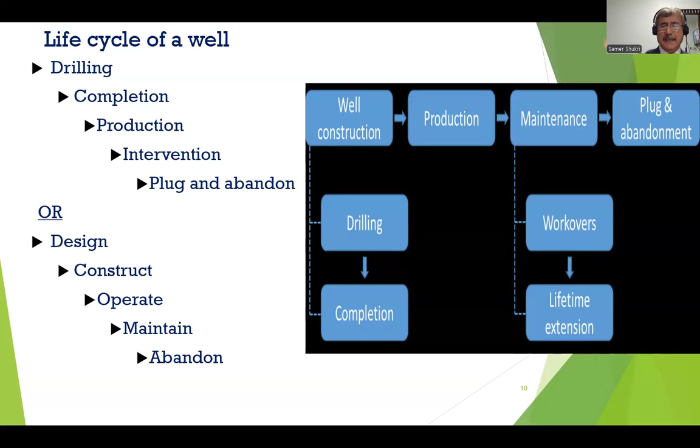Now, the 3D seismic, as I mentioned, is one of the most important techniques to help geologists and engineers find out where possible hydrocarbon is located. We are not sure, but possible hydrocarbon is below thousands of feet, maybe 10,000 feet below the Earth's surface. Without 3D seismic technology, many oil fields cannot be discovered.

As I told you, we have 2D, 3D, 4D. 4D is the most advanced technology for the seismic survey. The geoscientists have a secret weapon called seismic exploration. And it involves sending acoustic or sonic energy, which takes the form of wavelets, through the layers downhole into the ground to get a sound picture beneath the surface.

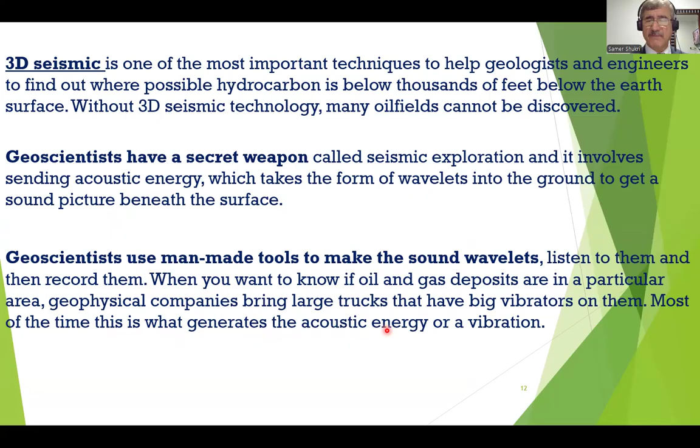They use geophones. The geophone will be the receiver. Geophones, or hydrophones in the offshore. In the sea, we use hydrophones. On the land, we use geophones, or very sensitive seismic microphones.

It can receive the sonic waves to hear the reflected sounds, but sometimes they set off small buried charges. Sometimes we put very small charges or explosives. Instead of vibrating with a huge machine, we use maybe an explosion, very small, maybe 5 grams or like this. It doesn't affect anything, and it is allowed in our industry.

So they set many geophones, or receivers, on the ground on the other side in a line, and they are attached. We attach these geophones to a recorder inside another truck. So one truck for sending waves, and one truck is connected with the geophones, like listeners.

The vibrators send thousands of wavelets down into all the different layers of the earth. Some of the wavelets bounce off - we have either reflection, like this, or we have refraction. What do you mean refraction? Look at me, please. This, then it moves on the surface of the layer, then it will go up. We call this one refraction, inkisar.

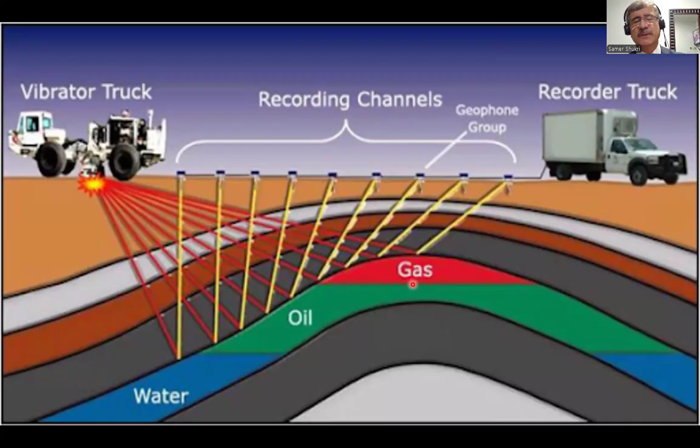So we have either the vibrator truck, or what we call small explosions, explosives. Then it will reflect to the geophones - recording channels, or geophones, we call it. All of them connect to the recording truck, the recorder, we call it. So this will tell you the possibility. Everything is a possibility. What ensures 100% that we should drill? Without the drilling, we are not sure.

Here we have offshore. We have a source of shock waves - we could use air guns, not explosives. What did you imagine? No, air guns. It will generate air waves, and it will reflect to the hydrophones. We call this one not geophones, but hydrophones.

Now I want to tell you about the IWCF. It is not allowed for anyone in respected companies, in your country, to work without this well control certificate. In your company it is very respected. I gave them a course last month and they are at a very high level, so they don't allow you to work if you don't have this well control certificate.

We have two types of certificates: either British, IWCF, International Well Control Forum, or IADC, which is American, based in Texas. IWCF is in Scotland, UK. The other one is IADC, International Association of Drilling Contractors, based in Texas, America. Some companies accept this one, some accept that one.

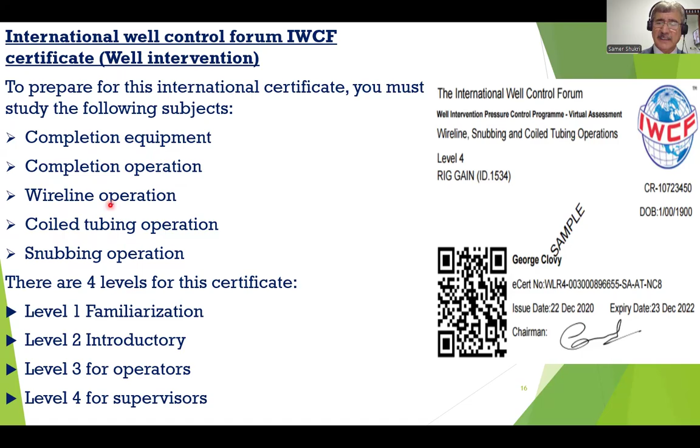For drilling, we have principles and procedures, equipment, and simulator. The simulator is not that difficult, but you need training to know the principles of it and how to work on it.

You will utilize it as if you are drilling or killing the well, same as a pilot. They don't allow the pilot to go straight to the aeroplane; they have to train him first on the simulator, with a different principle, then they allow him to go to the practical. It's the same for us.

This is also a sample. For example, surface BOP stack - we have surface stacks used onshore, and subsea stacks used offshore. Just take an idea now, so in the future when you need it, you can go through it. Also we have levels 1, 2, 3, 4. There are two types of stacks: surface and subsea.

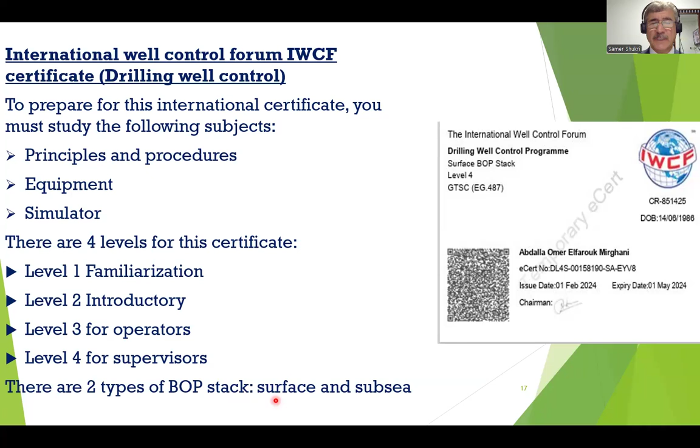For well control calculations, you have to know all of these, and I am sure you know them, but just for refresh I put them here. Please look at them; if you have any gap, you have to fill it, because these are like the alphabet for you as a petroleum engineer. You have to know hydrostatic pressure, bottom hole pressure, reservoir pressure, specific gravity, capacities, etc. I am sure all of you are very brilliant in these calculations, but I put them here just to ensure you are practicing them.

Now let us move on to the drilling rigs. What is the definition of the drilling rig? It is an integrated system. About 10 days ago I came back from Abu Dhabi where I delivered a course called rig inspection and audit.

I delivered it to 8 engineers; the month before, I delivered it to 11 engineers. So it is very important - every month companies require rig inspection and audit. So what is the drilling rig? We inspect every single piece in the rig. It is an integrated system, a group of pieces or systems that drills wells.

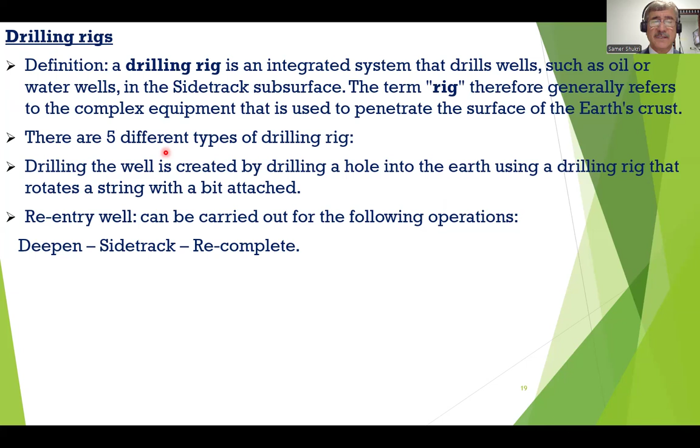Re-entry well operations can also be carried out for the following: either we can deepen or increase the depth of the well, side tracking, or recompletion.

The semi-submersible and the drill ship, we use these maybe in the North Sea, the Black Sea, the Gulf of Mexico. The drill ship has a depth capability up to 12,000 feet, while the semi-submersible rig goes up to 10,000 feet. So we have different rigs.

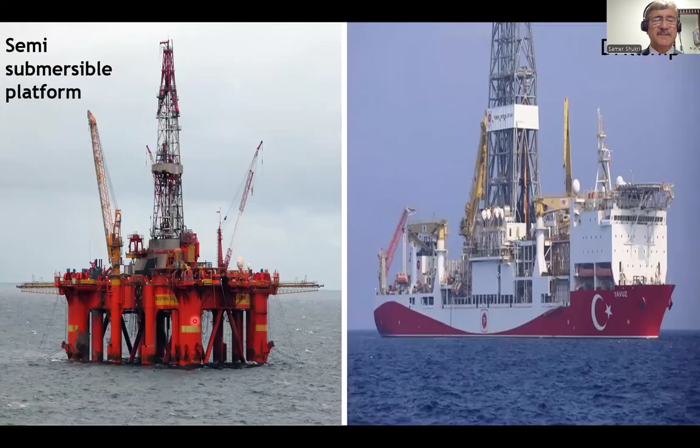And here, this is a Turkish drill ship, called Yavuz. They drilled in the Mediterranean and in the Black Sea. They found gas in the Black Sea, and the government gave us gas free of charge for 1 year because they discovered gas. For all the population of Turkey, 85 million, we took gas free of charge.

We didn't pay anything. Now, wells can be exploration or production, as I mentioned. Maybe also between them we have appraisal, only one well.

According to shape, we have vertical, horizontal, or deviated wells. We also have TVD and measured depth. What is the difference? If it is vertical, the TVD (true vertical depth) is the same as measured depth. While here, deviated, the measured depth is longer than the true vertical depth.

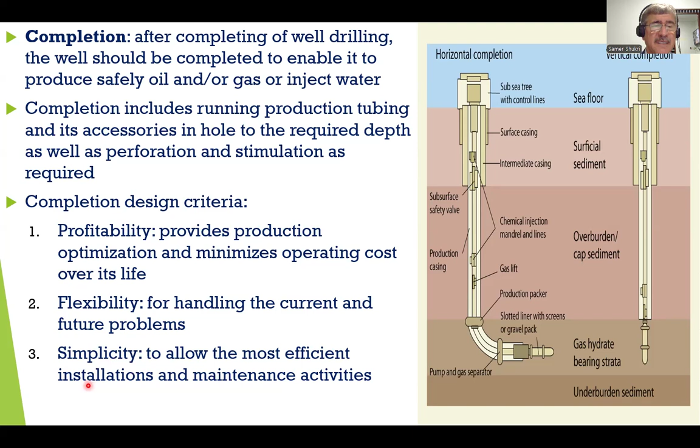So it should be profitable and minimize operating cost, which we call OPEX, over its life. Flexibility: it should be flexible for handling current and future problems. Simplicity: it should be as simple as possible to allow the most efficient installation and maintenance activities.

Here are the completion objectives. This is an example of completion, which we call a single selective completion. Look at this: how many reservoirs do we have? 1, 2, 3 - we call them bottom zone, middle zone, top zone. We isolate each from the others using packers, packer number 1, 2, 3.

Now, if we want to produce from this zone, we close the SSD (sliding side door) and set the plug here, then open this SSD. If we want to produce from here, we close the SSD, set the plug here, and open the SSD. If we want to produce only from here, we close the SSD and produce from that zone.

So the completion will protect the casing, as I told you, because the fluid has too many things: pressure, temperature, H2S, CO2, salts, water, asphaltene, sand, wax, etc. We have to protect the casing, because if you protect it, it will serve you for maybe 100 years instead of losing your well. It also provides optimum flow conditions.

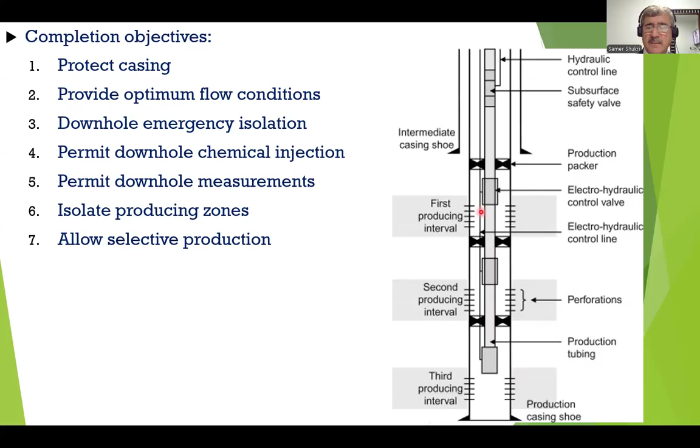What do we mean by consolidated reservoir? It should not be sandstone, because sandstone moves from the formation to the bottom of the hole and will plug it. But if we have, for example, limestone or dolomite, then it will not move.

So open hole completion has advantages and disadvantages. The advantage is the cost will be less and there will be less contamination. But for the disadvantages, if we run the casing with cement, it will make pollution and create restriction between the formation and the bottom of the hole.

We have a cased hole, perforated hole. You see, we have cased hole, perforated hole. This is also cased hole and perforated. We run casing, pump cement behind it, and then perforate it. You see the perforation. And here we have a dual packer, which we call this one.

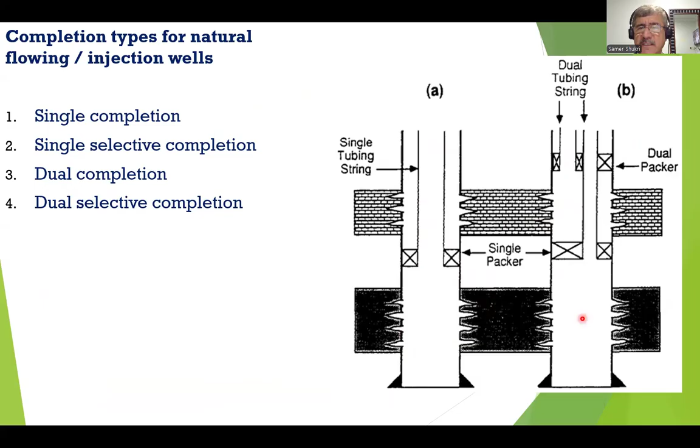We run the packer to isolate the zone above the top perforation and the tubing. This is single tubing and we can produce from here. Here we can produce from the top completion, a top reservoir, and here from the bottom reservoir - so long string and short string.

Now, another subject: if the well is not able to produce naturally, what shall we do, my friends? We have to use artificial lift. We have 5 artificial lift methods: gas lift, ESP (electrical submersible pump), beam pump or sucker rod, PCP (progressive cavity pump), and hydraulic or jet pump.

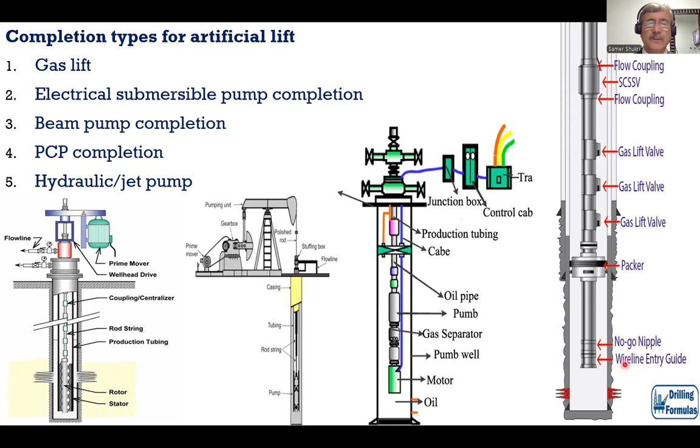Here is the completion. This is the top completion, this is the bottom completion. We have the packer, and we have the tubing hanger. The tubing hanger has four functions.

What are these functions? Let me read what Mr. Osama is asking: what are the operations used to open and close the packer?

The packer - we have either a permanent packer or a retrievable packer. The permanent packer, we run it either with a drill string or with electric line. We set it, and this needs milling to retrieve it. When we have a workover, we have to retrieve it using only milling.

This question comes in the exam of well control: how can you retrieve the permanent packer? We can run it either with electric line, set it by sending an electrical signal, or by drill string, where we drop a ball and make a hydraulic setting.

For the retrievable packer, we have two ways to set it. The first way, we can run it with the completion that we set in the well. Then we set the plug here, for example, and increase the pressure above the plug until the packer sets. This is number one - we call it hydraulically set.

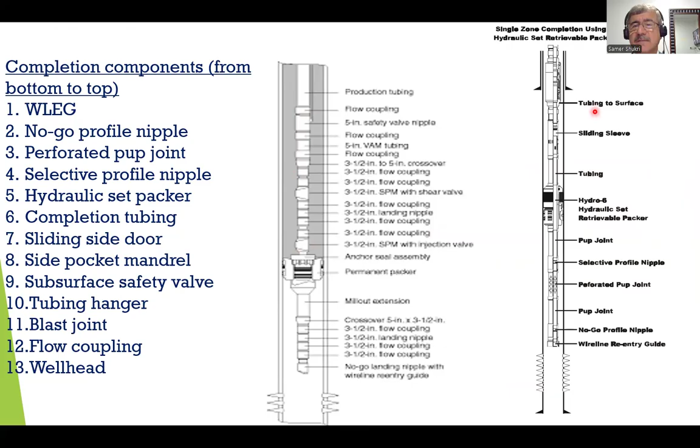We have the subsurface safety valve for safety. Where is the subsurface safety valve? Tubing... where is it? This one, the subsurface safety valve. You see this one.

We have the tubing hanger. The tubing hanger has four functions. If you want to write them down, it will be better for you because it adds more value, and this also comes in the exam.

Function number one: it can hold the weight of the completion. You see, the weight of the completion. This is the tubing hanger, and it can hold the weight of the completion.

Number two, it can isolate the tubing from the annulus. Number three, we can set in the profile here either a back pressure valve or a two-way check valve.

Back pressure valve or two-way check valve. Number four, we can run a control line. You see, this is the control line for the subsurface safety valve running through it. So, four functions.

The blast joint, we use it when we have a zone like this one. I'll show you. You see the blast joint, the blast joint.

If we have this zone and the flow of the fluid is colliding with the tubing from the outside, it will erode it. By time, it will erode it.

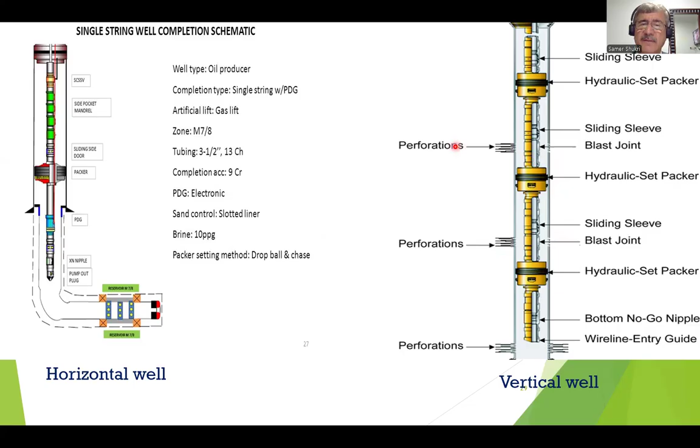So this one, we call it a blast joint, opposite to the formation. It may be 20 feet, 30 feet, or 10 feet, depending on the length of the perforation.

We also have the flow coupling to reduce erosion, maybe for the SSD, for the subsurface safety valve, or for the nipple, before and after. I'll show you next. A flow coupling, where is it? This one, you see, flow coupling. So before and after the landing nipple, before and after the SPM, before and after the subsurface safety valve.

We also have the wellhead at the surface. We've talked about all of these. These are the tubing hangers. We also have the back pressure valve and two-way check valve. The right one is the two-way check valve. These are used to secure the well, and we can set them in the tubing hanger profile.

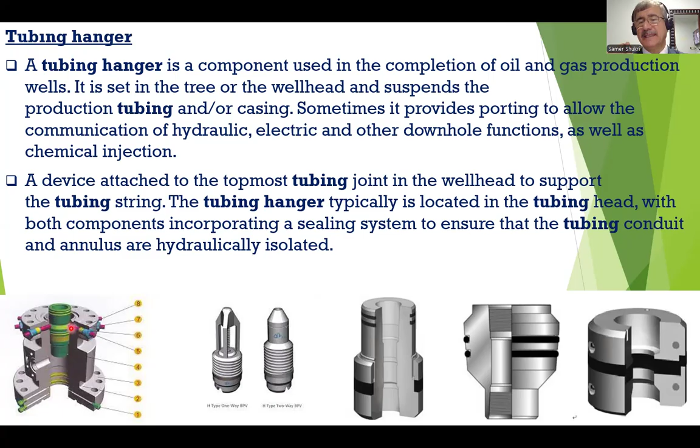This is the tubing hanger profile, the green one. When we set it, we have to close the fingers or tie down bolts, the red ones. Over time, there will be very high pressure that may push the completion up. If we close the tie down bolts, it will catch it mechanically and prevent it from jumping up.

This subsurface safety valve is a device installed in the upper well bore to provide emergency closure. If you remember, in 1991 in Kuwait, there were many wells burning as a result of the war.

There should be subsurface safety valves. After that, the whole world learned a lesson: every well that has the potential to flow naturally should be equipped with a subsurface safety valve.

We have two types of subsurface safety valve: surface control and subsurface control. Subsurface control we don't use for the time being, it's an old model, but we have to know about it. We open it by increasing the pressure in the tubing and close it by reducing the pressure in the tubing.

For the surface control, we run the subsurface safety valve like this one, with a control line. The control line is stainless steel, grade 316. We can run it to a depth less than 2,000 feet, maybe 1,000 feet, plus or minus. We have two types: tubing retrievable and wireline retrievable.

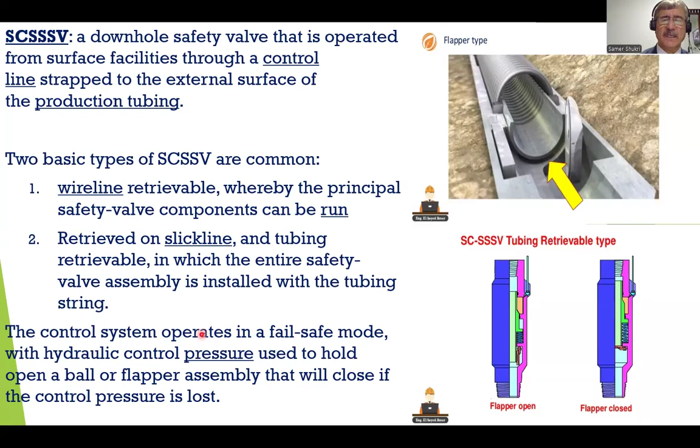Why? Because we applied pressure inside more than the pressure outside, more than the burst pressure. Maybe the burst pressure is 3,000 psi, so we apply 3,000, and it will explode from inside to the outside, or collapse from outside to the inside.

How can we connect the tubing joints between each other? Using the tool joint, you see the tool joint, this one, we call it tool joint. It has a standard length of 9.6 meters, or 30 feet, 30 or 31 feet. For the casing, we use a standard length of 40 feet.

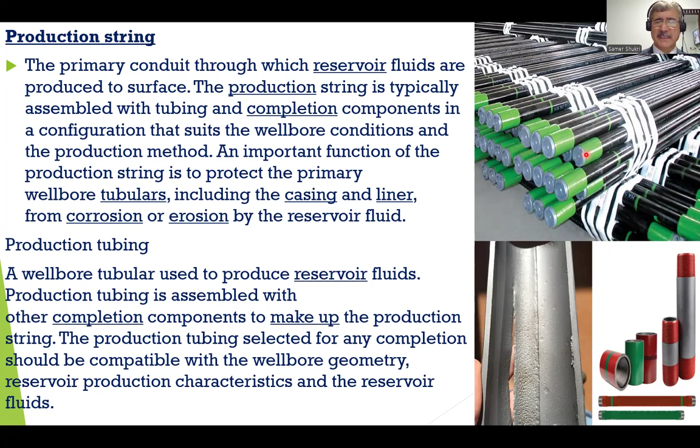For the retrievable packer, when we pull the packer, it will release. When we pull the completion, the packer will release. That's it, very easy, this is very easy.

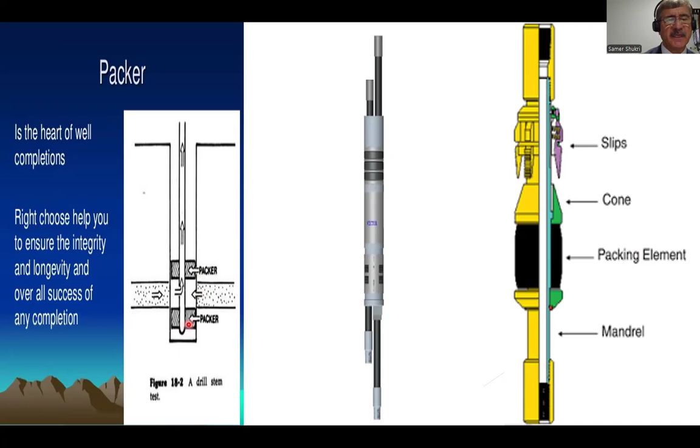You see, we can do it. This is what we call the heart of our well completions, the packer. It is the heart. For example, if we want to produce from here, we can set a packer here, and then we can produce it to the surface.

The landing nipple, as I told you, we can set a plug, we can set the bomb hanger. We have different types - it is a place to set the plug, wireline plug. Or we can set, for example, a gauge or bomb hanger. So we have three types.

We have no-go nipples. We have this one, only we run one - we call it bottom no-go. We have selective landing nipples - we may have 2, 3, 4, whatever. The no-go will be from the top for the selective, while for the bottom no-go, the no-go will be from the bottom.

We call it R nipple or XN nipple, depending on whether Otis or Baker. For Baker, we have F nipple and R nipple. For Otis, we have X and XN. We also have the ported or safety valve landing nipple.

As I told you, when the tubing retrievable safety valve has failed and we don't have a workover, we can set the wireline retrievable inside the tubing retrievable, and this acts as a temporary solution.

This is the bottom no-go or no-go landing nipple. We set it in the deepest point of the well. For Baker we call it R nipple, or for Otis we call it XN nipple - you see this one. We have only one, and it is in the deepest point of the well.

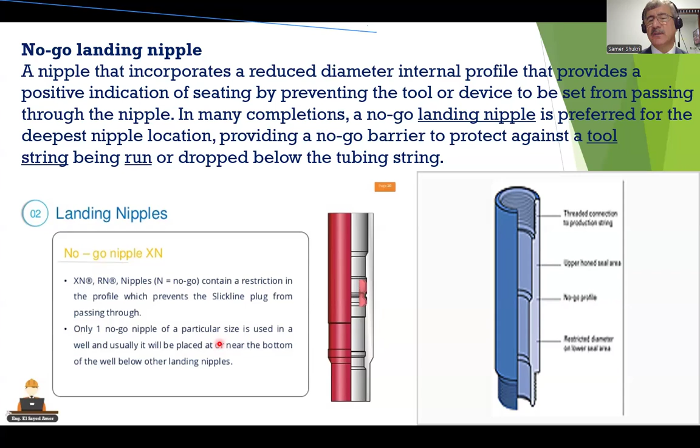We have the selective nipple - we may have 2, 3, 4, or 6 like this. The top no-go has a no-go, but from the top.

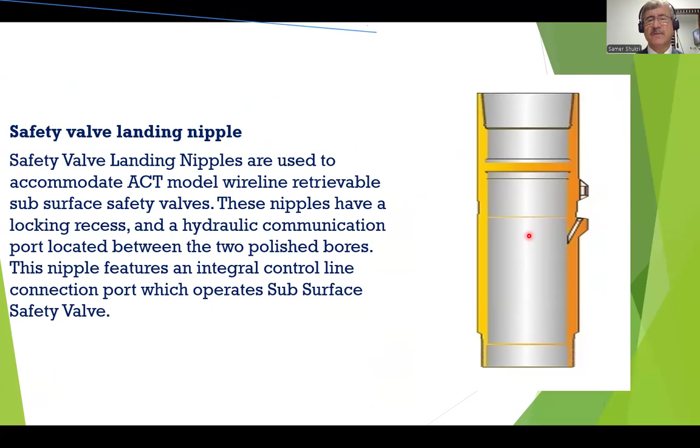The safety valve landing nipple - as I just told you, if the tubing retrievable has failed and we don't have workover, we can lock open the safety valve and install the wireline retrievable inside the safety valve landing nipple.

Circulating devices like SSD - I explained about SSD, and now I will explain more. Also, we have the side pocket mandrel. What is SSD? This is the SSD, you see. It has two positions, open and closed.

This is closed, look at it. We have a sleeve, and this sleeve can be moved up and down. It has holes here and holes here. When the holes are not opposite each other, it will be closed. When the holes are opposite each other, it is open, so we can pump from the annulus to the tubing to the surface and circulate the well.

Here you cannot do it. This is the SSD complete one also, but here it is more clear - you see, this is the SSD.

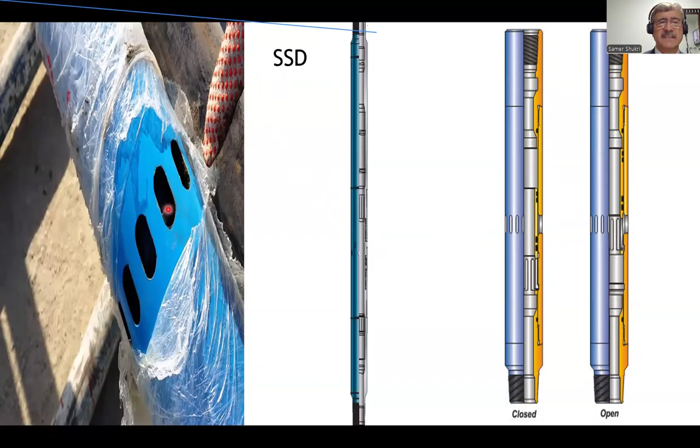If you go to a workshop, to one of the companies, and take this one and ask them where is the SSD, where is the side pocket mandrel, they will show you the subsurface safety valve. The side pocket mandrel is this one.

It's like a kangaroo - you know the kangaroo, where does the kangaroo put his child? In a pocket. We call it, like here, side pocket mandrel. So here we set the gas lift valve, and we can produce from the annulus gas.

We pump gas to the tubing to the surface. How can we set the gas lift valve? Using the kick-over tool - we call this one the kick-over tool.

Here we talked about the flow coupling and the blast joint, to reduce the erosion. You see these - a flow coupling also.

Polished bore receptacle - we install this one between the tubing and the packer. We call it polished bore receptacle, or in another design, we call it seal bore extension, or in another design, we call it a tubing seal bore receptacle.

So what is the reason to install this PBR? Because the tubing, as it is producing, will expand. The temperature will increase and the tubing will expand. Now, if it is one part with the packer, in this case, it will unset the packer or cause damage to it.

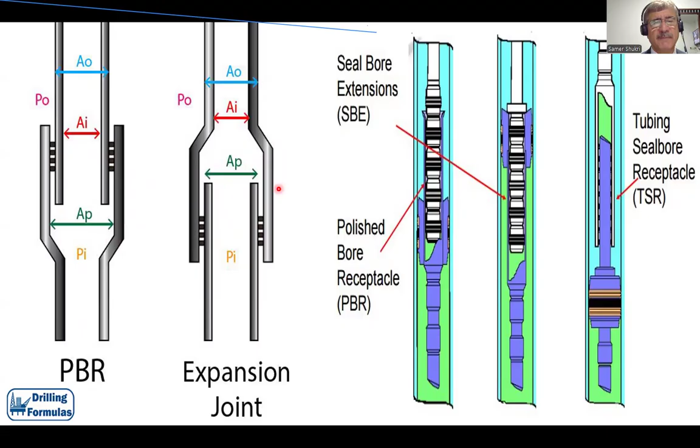You see, either we have male, the other one is female - for the PBR or the expansion joint, we have male from the top and female from this one.

Wireline entry guide, as I told you, we can run the wireline tool string or coil tubing tool string out of the completion, then return it back safely to the completion. We have two types: bell guide, which we run in vertical wells, and this one we run in horizontal and highly deviated wells. We call this one mule shoe, and we run it in the vertical way as well.

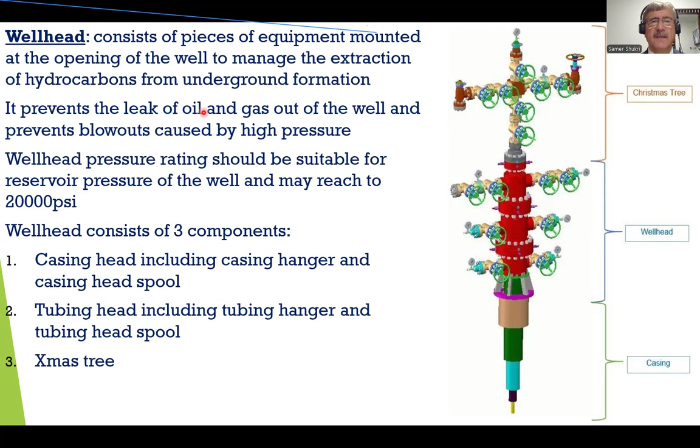For the wellhead, this is the Christmas tree, but the whole assembly we call the wellhead, from the bottom, from the cellar to the tree cap, here the pressure gauge. This one is for the surface casing. This is conductor, this is surface casing, intermediate casing. Then we have the tubing hanger here, and we have the Christmas tree.

So all of this together we call the wellhead. We have two types of Christmas tree, controlling production or injection: conventional Christmas tree, and monoblock. We call this one monoblock. We use this one for high pressure, maybe gas wells. This one is conventional, for maybe oil wells and intermediate pressure, not high pressure.

We have lower master valve, upper master valve, swab valve, kill wing valve, flow wing valve, and choke valve. The choke may be 2-inch or 3-inch. For the monoblock, we can use it for the gas wells, and it will be one part, this one part.

For this one, we have a flange. You see, flange between valves. We call this one a cross, you see, cross, this one. Here we have the tubing hanger. We have the conductor, surface casing, intermediate casing, production casing, and this is production tubing.

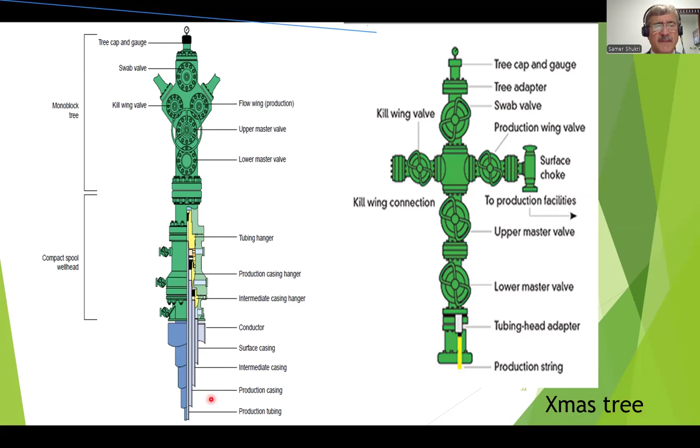You see the Christmas tree, this one, or the wellhead, for example. The Christmas tree is from here to here, we call this one, but all of it we call wellhead. You see this one, this is a gas well. You can imagine how big the Christmas tree is for this one.

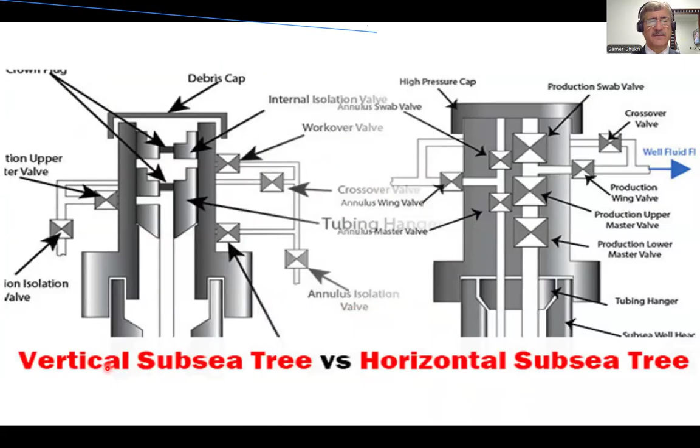Here also we have conventional Christmas tree, the green one. We have monoblock for the gas well, and we have compact or subsea. What is subsea? You see, monoblock, this one, we use it for the gas wells. Here is the subsea, you see, subsea. We have vertical and we have horizontal.

Here also the subsea. I don't think you have a big idea about the subsea, but take an idea now. How can we control it? We can run something like a robot, we call it ROV, remote operated vehicle. This remote operated vehicle can replace something, repair something, because at depth maybe 1,000 or 2,000 meters, in the Gulf of Mexico or the North Sea for example, you cannot send somebody to dive and do this and this. No, you can send the ROV like a robot, and you can control it as if you are playing games. It has a simple principle, and you can replace whatever you want and control it that way.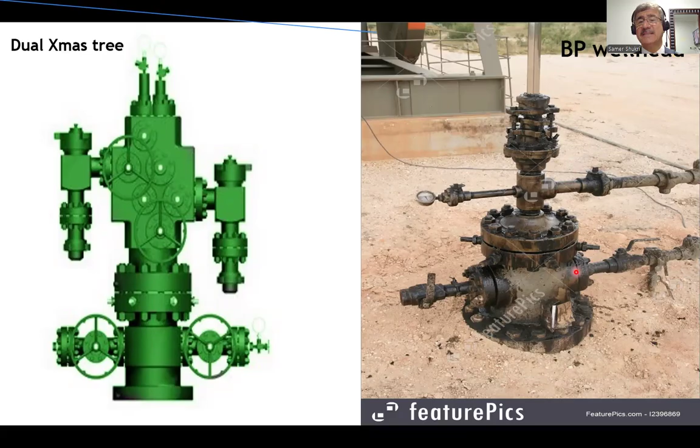We have also the production line, this one. Here we have the gas venting from the annulus. At a certain pressure, it can open and relieve the gas from the annulus. Here also we have ESP. When you see this one, it means it is ESP, because we run the cable, the electric cable, from the surface to the motor.

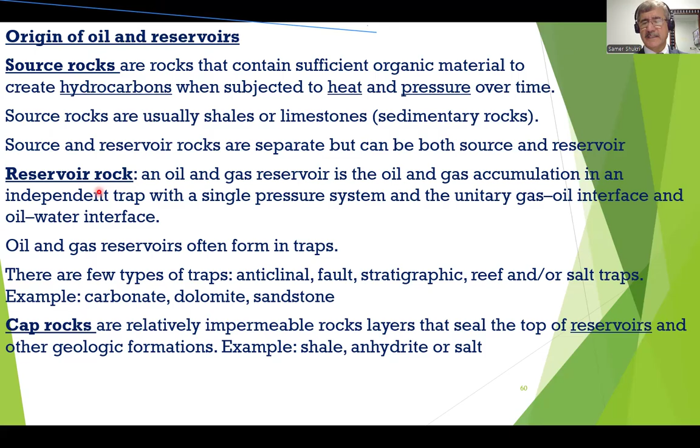Have you studied the traps in the university or not? Do you have any idea about the origin of the oil? You didn't take it? Just tell me yes or no. For some students here we have an idea, but for some, no.

Now you can add some of this information to your knowledge, and you can search maybe in Google, maybe in some books. You can ask your doctor, what is this? At least the doctor will not give you the full picture, right? He will give you the main subject, and you have to do the search.

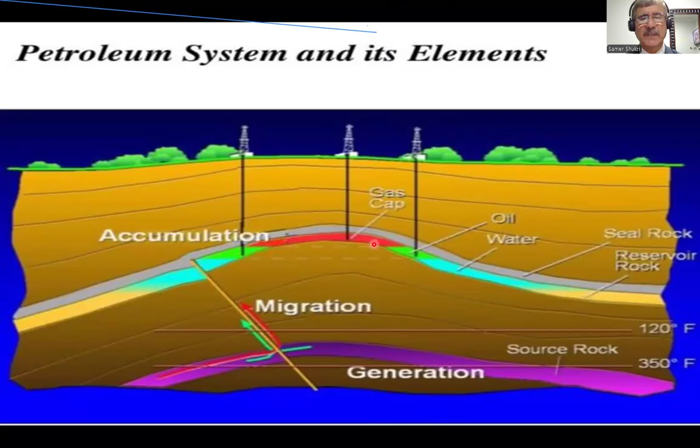So here also we have the source rock, you see, we have migration to the reservoir, and here we have the cap rock. Normally the gas accumulates at the top, then the oil below it, then the water, depending on the density of the fluid.

Now for your information, my friends, the liquid, we call it oil and water, we call them liquids, and they cannot be compressed that much, maybe very limited compression. While the gas, it is compressed, and we can apply Boyle's law.

Boyle's law, which is P1 V1 equals P2 V2, at the same temperature. As the pressure increases, the volume decreases. As the pressure decreases, the volume increases, and so on.

Let me see how does the subsurface safety valve function in a Christmas tree. It is not in the Christmas tree, my friend, it is deep in the hole, maybe at 500 feet, 1,000 feet. We connect it to a hand pump and apply pressure to the control line, and this will make it open or close. If we increase the pressure in the control line, it will open. If we bleed off the pressure in the control line, it will close.

I meant how the SCSSV works, like do we put it in the well while constructing, or do we put it from the lateral valve in the Christmas tree, put it in the well, use it, then get it out? When you run the completion, it will be part of the completion, at a depth maybe 500 meters, 300 meters, depending on the company's policy. It will be connected to the control line, quarter inch. At the surface we connect a hand pump. When the hand pump increases the pressure in this control line, it will open. When we bleed off the pressure, it will close.

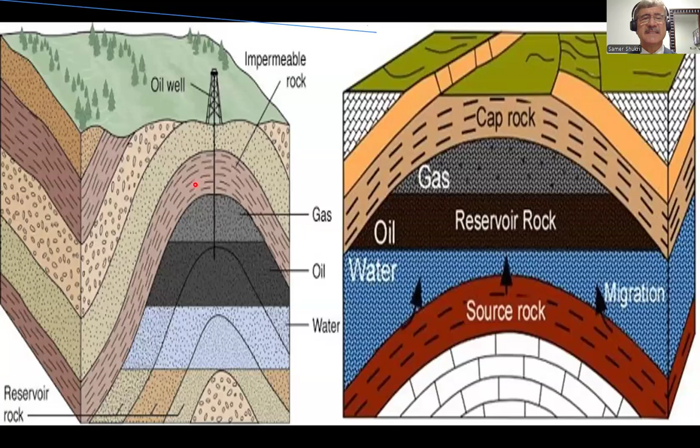Reservoir characteristics: we have porosity and permeability. The porosity is the percentage of the voids in the reservoir. Maybe the volume of the void is 40, for example, and the total is 100, so 40 divided by 100 is 40%. So we take it as a percentage, it doesn't have a unit.

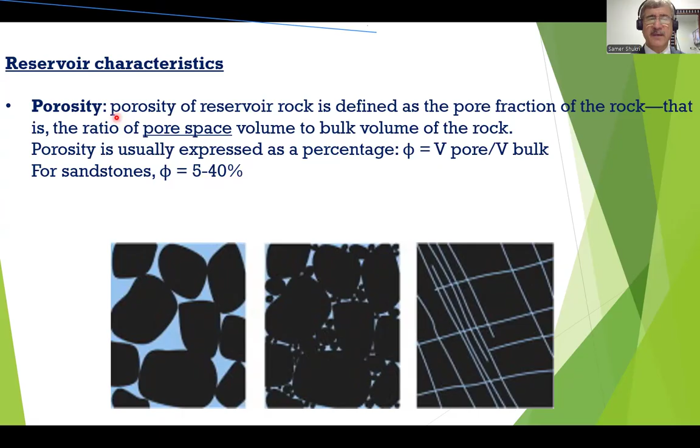So this is the percentage of the pore spaces in the reservoir, this is porosity. While the permeability is the ability of the reservoir to pass fluid through it under delta P, differential pressure. For permeability we use the Darcy or millidarcy as the unit.

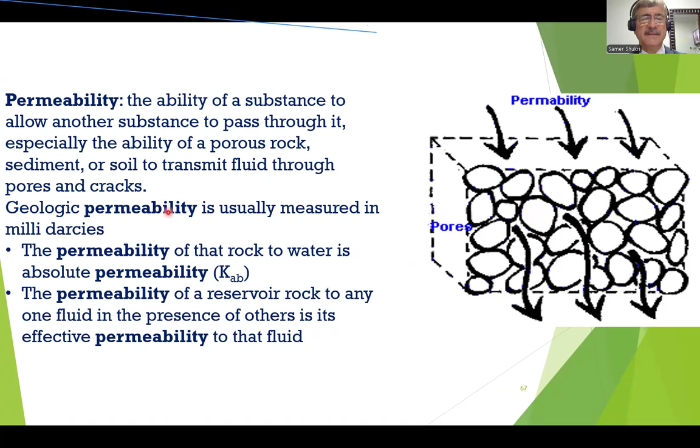Hydrocarbons, as I mentioned, we have about 1,000 compounds that can be obtained from oil, crude oil, like plastic, fiber, rubbers, explosives, solvents, etc. Oil, gas, water, asphalt, wax, all of them. So the combination of carbon and hydrogen, we call it hydrocarbon.

We have bubble point pressure. It is the pressure at which the first bubble of gas will release from the fluid. We always have to keep the reservoir above the bubble point pressure to avoid releasing gas from the reservoir. It is very important.

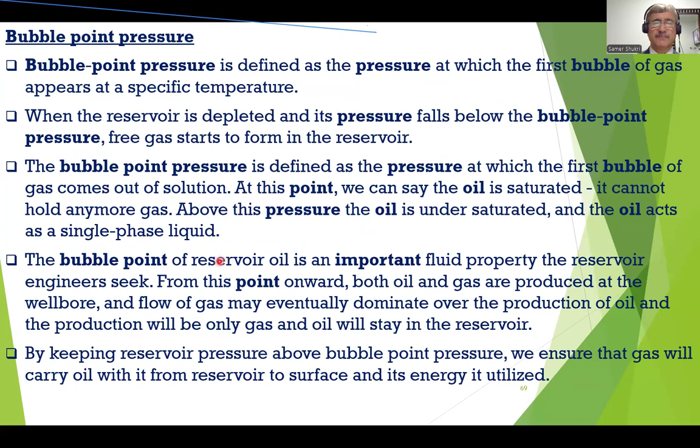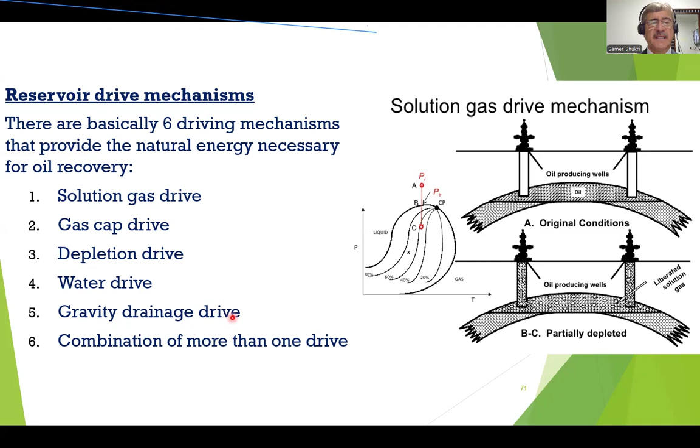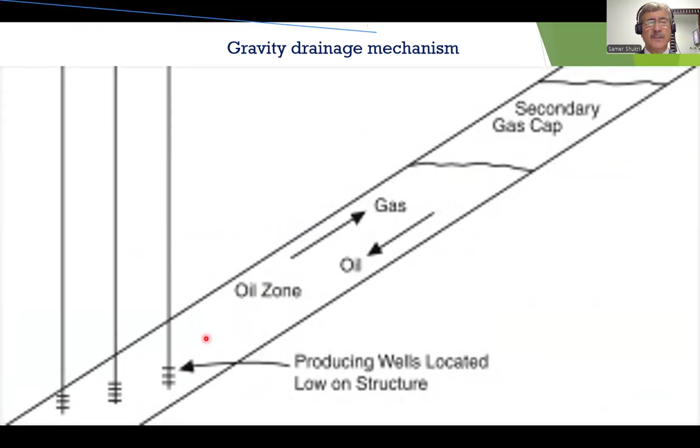The reservoir drive mechanisms, we have different types. The most famous one is water drive. We have gas cap drive, solution gas drive, also depletion drive, and gravity drainage. We also have a combination of more than one. This is the gravity drainage mechanism: the gas will go up and the oil will go down. Here also we can have a combination of more than one drive mechanism.

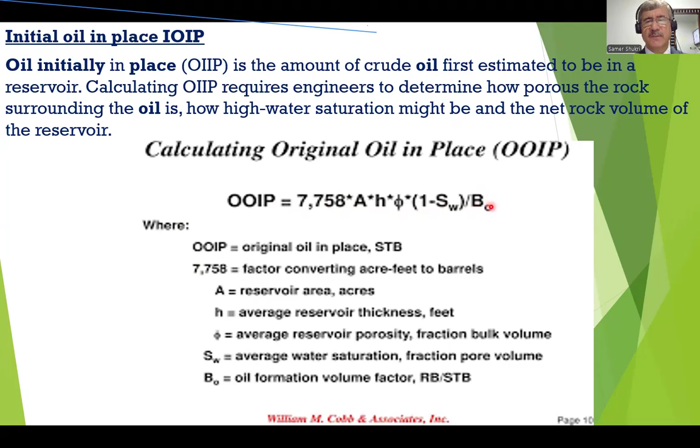Initial oil in place, also all of these I put just to refresh your knowledge because you should have taken it in the university. How much is original oil in the reservoir? We call it, the unit is stock tank barrel. We need the porosity, we need the thickness H, we need the area, we have a constant here also. We need water saturation, and also oil formation volume factor. All of these we need.

Also Boyle's law, as I told you: P1V1 equals P2V2. We call it Boyle-Mariotte law. We suppose the temperature is constant, then PV equals a constant, we can use this one. Look at it, P1V1 equals P2V2. You see, when the pressure increases, the volume decreases, and when the pressure decreases, the volume increases, and so on. At the same temperature, when the pressure increases, the volume decreases, and vice versa.

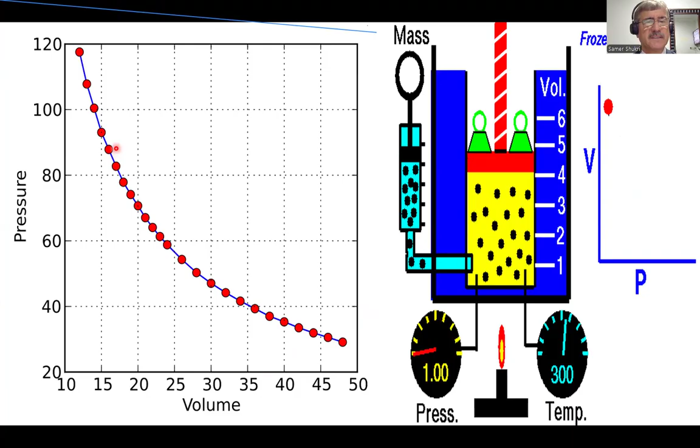Now for the gas lift. This is the gas lift. We inject gas from the annulus to the tubing to the surface, and we can reduce the hydrostatic pressure.

We call this production classified into 3 main stages. What are they? The primary, which is natural flow. Secondary, we may need artificial lift: gas lift, pumping. For pumping, we have 4: ESP, beam pump, PCP, jet pump.

We have tertiary, like using what we call EOR, enhanced oil recovery. We have polymer, we have chemical, we have heat, we have carbon dioxide, explosions, etc. Maybe burning the formation - we call it in situ combustion.

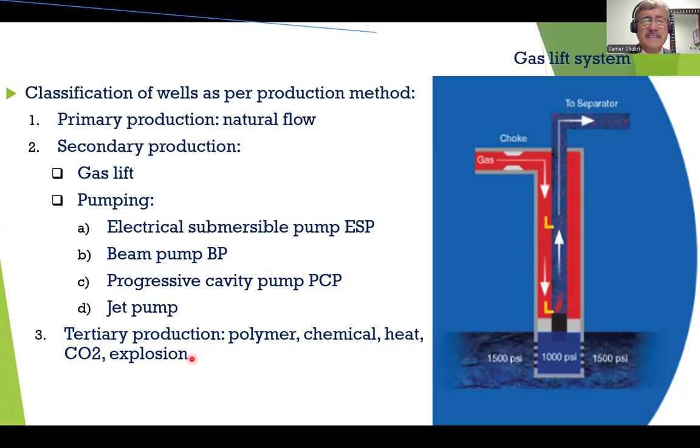In situ combustion, we can fire the part of the reservoir. In this case, it will increase the temperature, and we can reduce the viscosity of the oil, and it can move easily to the oil producer.

Here we have ESP. These are the parts of the ESP. Where is it? We have a plunger. This is the tubing, casing, gas lift valve. This is gas lift - we can pump gas from here to the gas lift mandrel to the surface.

What is this one? This is the controller. We have lubricator, catcher. This is a plunger. This plunger is moving from bottom to top, and then it will drop down. Every time it goes up, it will push all the volume in the tubing to the surface and produce it. So for this one, we close the well first and allow this plunger to go down.

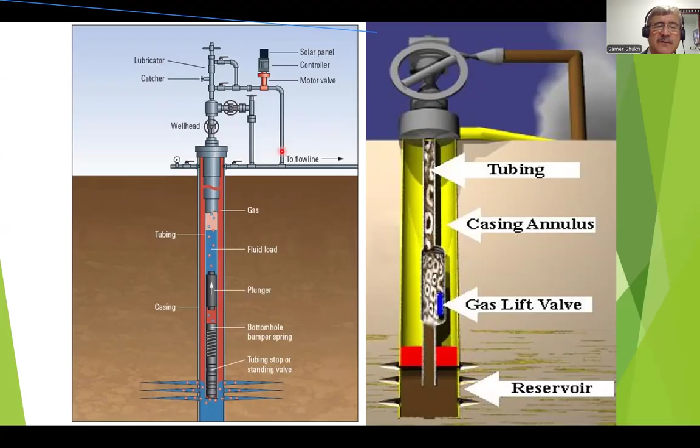Then we open it very fast. It will push the plunger up, and it will push in front of it the oil and gas to the flow line. We call it plunger or hydraulic pump.

And we have this one - beam pump. We have pump, we have sucker rod, and to the surface unit. We have horse head, polished rod, beam, and we have counterbalance here. We have crank, we have a prime mover or motor to the flow line, this one.

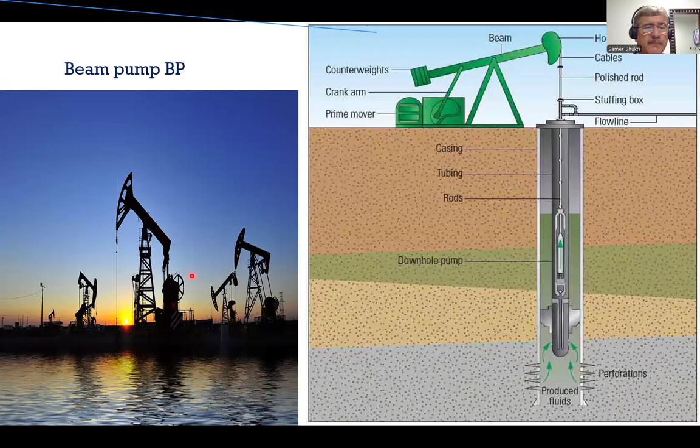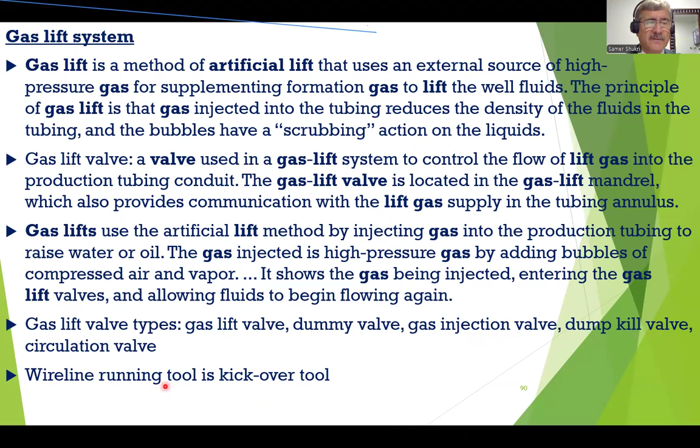Gas lift system - this is by pumping a gas into the annulus and take it through the tubing. And we have different types of gas lift valves: gas lift valve, dummy valve, gas injection valve, dump kill valve. We have circulation valve also. We run and pull the gas lift valve using the kickover tool. These are the types of the gas lift valves.

For the well intervention, we have 3 main types: we have wireline, we have coiled tubing, and we have snubbing.

For the wireline, we have three types. We have slick line, like this one, either stainless steel or carbon steel. If we have H2S, we use stainless steel. If we don't have H2S, we use carbon steel - it is cheaper. For the size, we use 0.108 or 0.125. There is less and there is more, but these are common.

For the slick line, we can do different operations like open, close SSD, set, pull gas lift valve, set, pull subsurface safety valve, etc., etc.

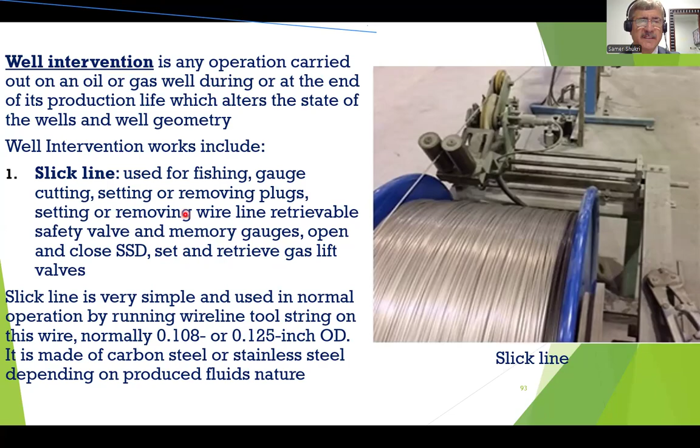You see this is the braided line. A braided line is used for fishing of the slick line and also for swabbing.

Electric line, we use it for setting the packer. This is number one. Number two, for logging. Number three, for perforation. And number four - water shutoff. Let me repeat: set packer, logging, perforation, and water shutoff.

So we have two main sizes for this braided line, 3/16 and 7/32. This braided line doesn't have a brass core inside it in the middle, so it doesn't conduct the electrical signal from surface to bottom, while this one has brass conductors, single conductor or multi-conductor - this one.

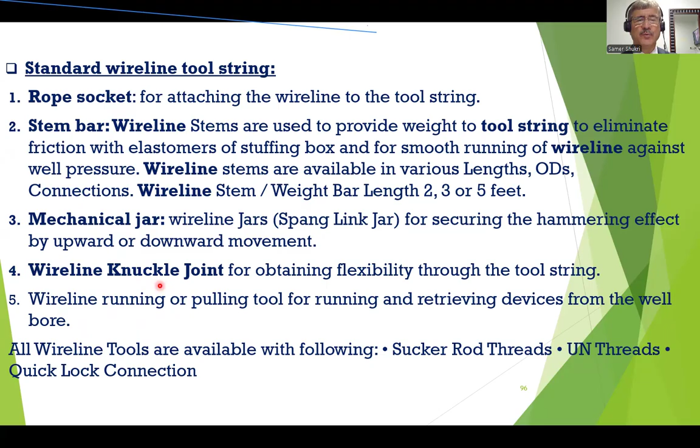This is the wireline tool string: rope socket from top to bottom, rope socket, stem bar, mechanical jar, a knuckle joint for deviated wells, and we can run tools, running tool, pulling tool, etc. These are the tools that we can run in the well. Fishing also, if we have fish, we have to know how to control it to avoid more complication of the operation. Here, braided line, as I mentioned, is used for fishing and swabbing.

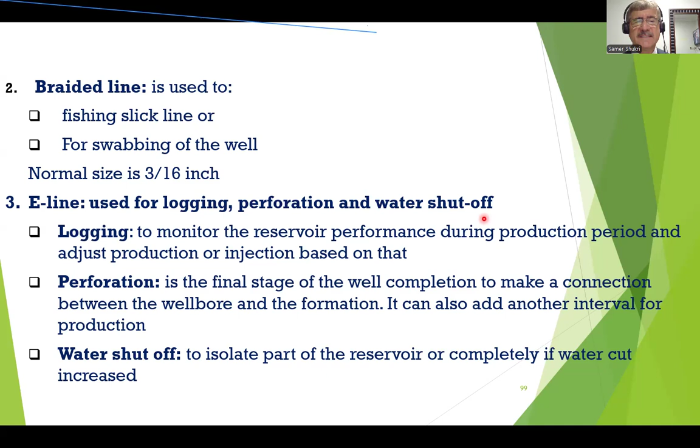The 3/16 and 7/32 E-line, as I told you, is used for logging, perforation, water shutoff, and set packer. These are the explanations about it. Perforation, we can perforate. You may visit some perforation, some logging, some extra, and take more information. We perforate either overbalanced or underbalanced.

We have coil tubing also. It is a very, very good invention. We can use it in well intervention. We normally use 1.5 inch, 1 3/4, and 2 inch. We can use it especially for stimulation, for operations in the horizontal section, highly deviated wells. And we can pump through it. We can do logging. We can do everything.

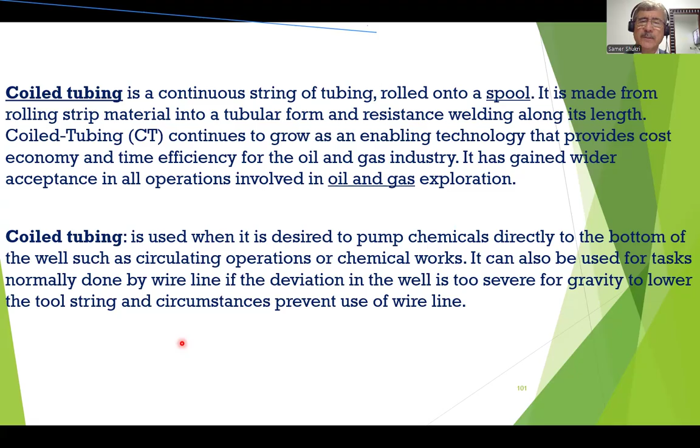Here are the parts of the coil tubing package. We have BOP, injector head, power pack, reel unit, and control cabin. We can do these operations and maybe double of them. Maybe we can count about 20 or 30 operations for the coil tubing.

But the main operations are: logging, cementing, nitrogen kickoff, coil tubing conveyed perforation, open and close SSD in horizontal completion, stimulation and fracturing, scale and sand clean out, milling and fishing.

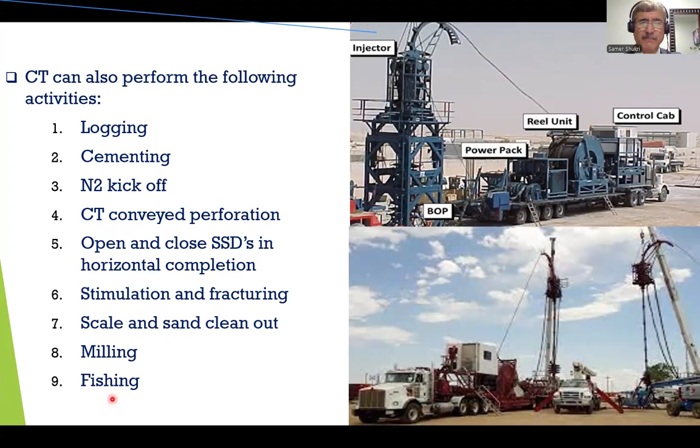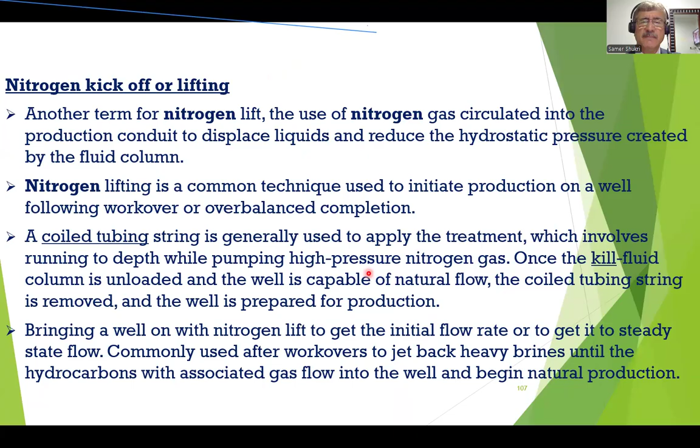Nitrogen kickoff: if the well has died, we can use nitrogen to lift it safely. Then we can pull the coil tubing to the surface.

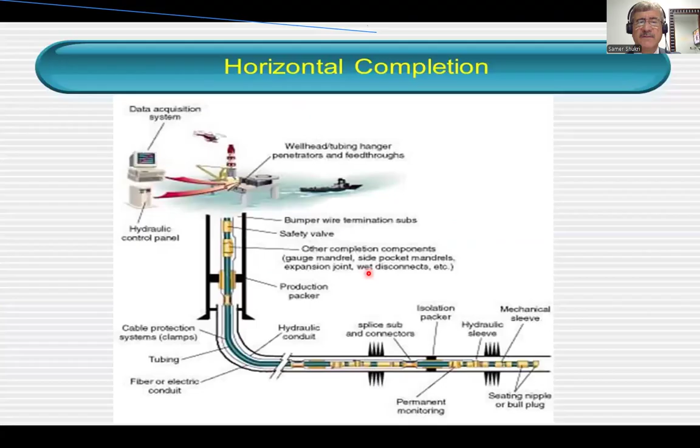Also, open and close SSD in horizontal completion - we can do it. This one, we have smart completion, horizontal completion.

Well stimulation, we have two types or four types of stimulation: we have acid wash, acid matrix acid stimulation, and we have fracturing and acid fracture. All of them, each one needs more explanation. Now I give you this just to have a look at it.

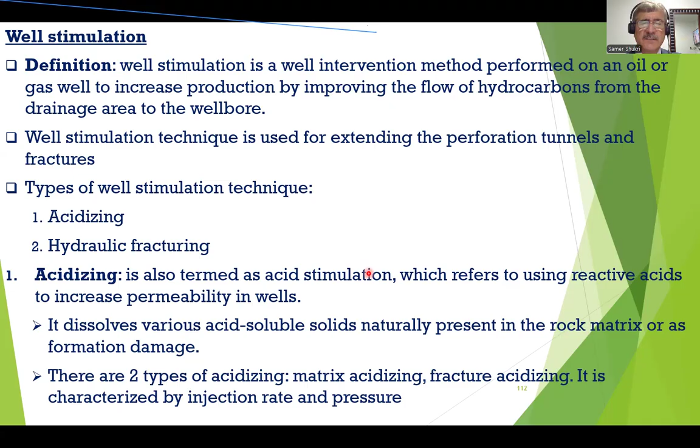We use 15% HCl or HF. HF is used for sandstone reservoirs, and for carbonate reservoirs we use hydrochloric acid, 15%, 20%, or 28%. The raw acid percentage is 32%. Also, we can use organic acids, which are acetic acid, CH3COOH, and formic acid, HCOOH. And we use a mix of them, 14:1 or 13:2 or 12:3. We can use them together.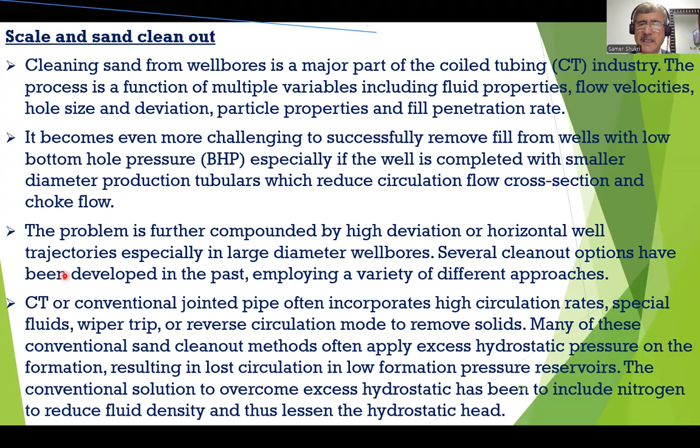Scale clean out: if we have scale or sand, we can do clean out using the coil tubing, and we can run rota wash on the coil tubing. We can use gel, high viscous gel, and do circulation. Milling also, if we have a stuck tool or a plug or anything, we can do milling for it. We have different types of milling tools. Fishing also, the fishing, you see.

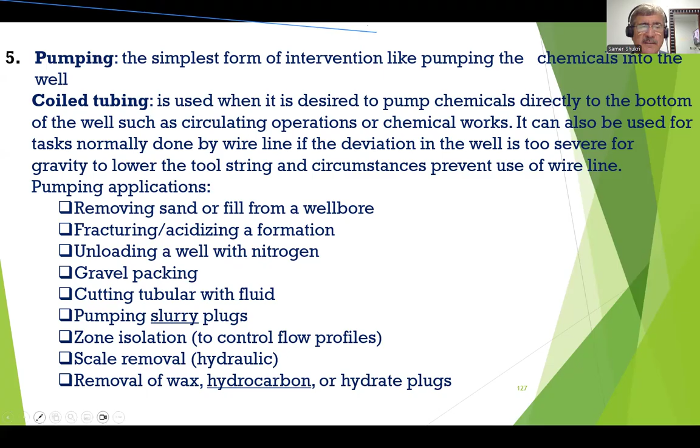Pumping, we can pump any fluid - cement, nitrogen, diesel, anything. We can use that with coil tubing because it can go into the horizontal section and we can pump. For example, pumping slurry plugs, cement plug, pump gravel pack, pump nitrogen, pump acid for acid stimulation, and so on, scale removal - all of them need pump.

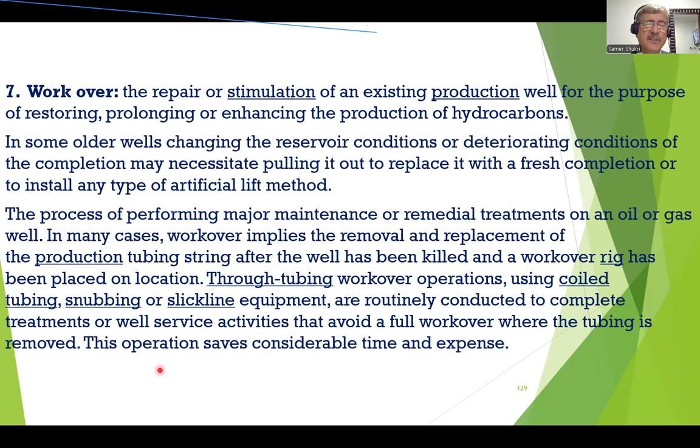Wellhead maintenance also - we have to keep the wellhead in good condition to avoid any problem. Workover: we can move the workover rig and pull the completion, run another completion, repair the casing if it is leaking. We can pull, for example, a single completion and run a dual completion, or vice versa, etc. You see, this is the workover.

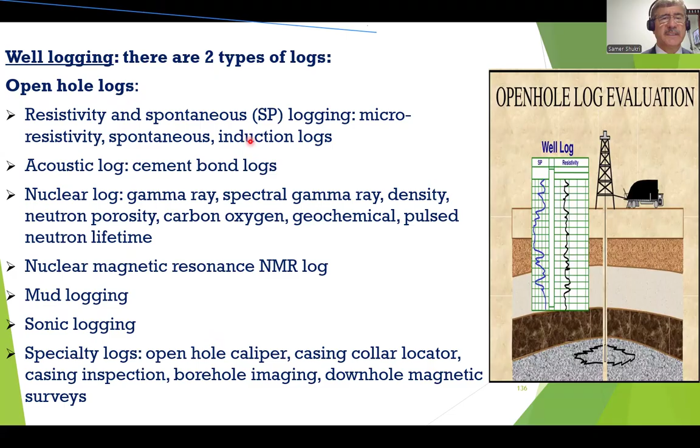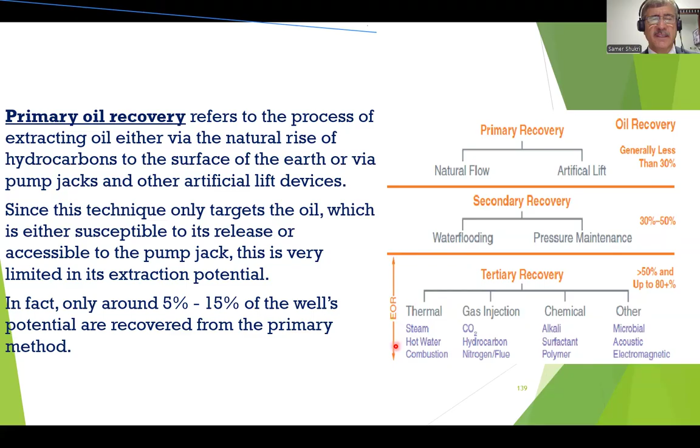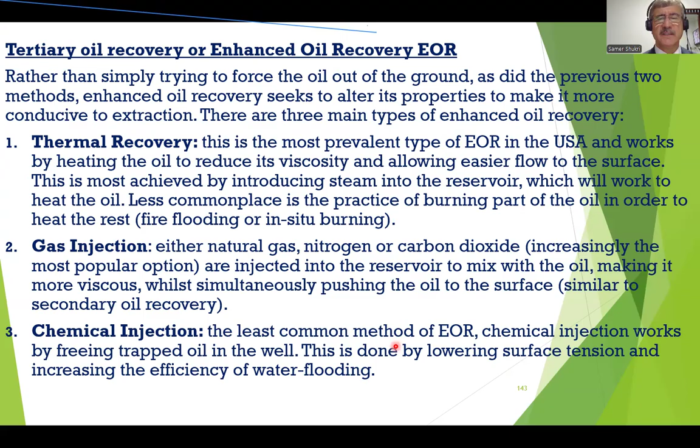Secondary - this is also water injection, gas injection, you see. Tertiary, this is the EOR. I think you have a good idea about EOR now. We have thermal recovery, gas injection, chemical injection. You see, we inject the steam, it will reduce the viscosity, then we can produce via the oil producer well, this one. You see steam.

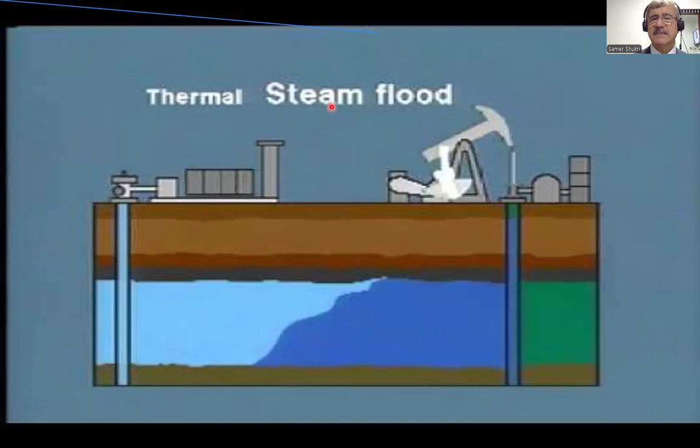In Kuwait, last month I was in Kuwait, there is a project consisting of 42 wells in North Kuwait. They inject steam to these 42 wells for 6 months, injecting only. Then they stop for 1 month, soaking time. Then they open the wells for 6 months of production. And then they can repeat this cycle. So 6 months inject steam to reduce the viscosity of the oil, 1 month soaking time, and 6 months production. This is steam flood. I give you this study case from Kuwait.

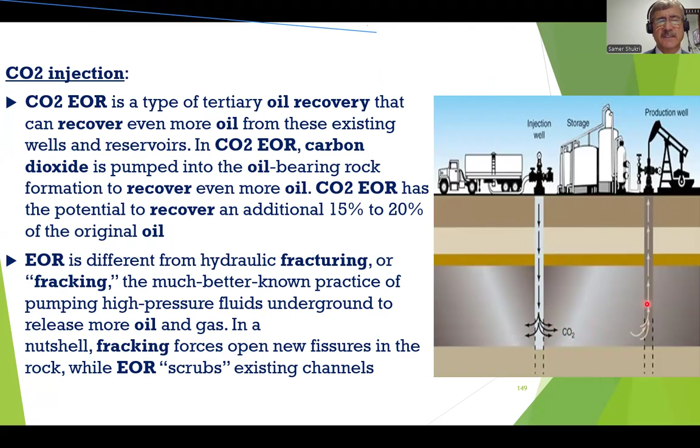Problems that can occur in the well - we may have scale, we may have hydrates like ice hydrates, we have wax, and we have paraffin. And for each one of them, I mentioned how you can solve it. Scale - you see, scale will be like this one. It will reduce the ID of the tube, you see?

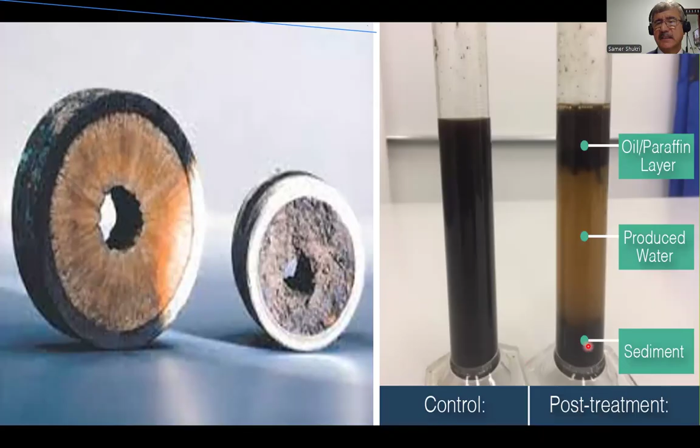Paraffin also, you see the paraffin like this one - this is sediment paraffin, you see? Asphaltene - that we use to make the roads between cities, between industry. This one, you see, asphaltene.

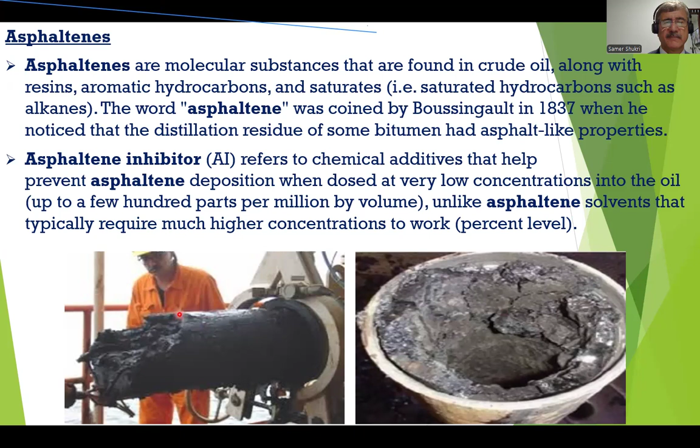Abandonment - what do we mean by abandonment? A well is said to reach an economic limit. What is economic limit? It will not give anything. If we spend, for example, more money on it, and it will not give us back this money that we spend, in this case it is not economic. We call it economic limit.

When its most efficient production rate does not cover the OPEX or operating expenses, in this case, the economic limit is raised and the life of the well is shortened. In this case, it's as if a man has died, and in this case we have to bury him. Proven oil reserves are lost - there is no oil in the well, and the well becomes abandoned.

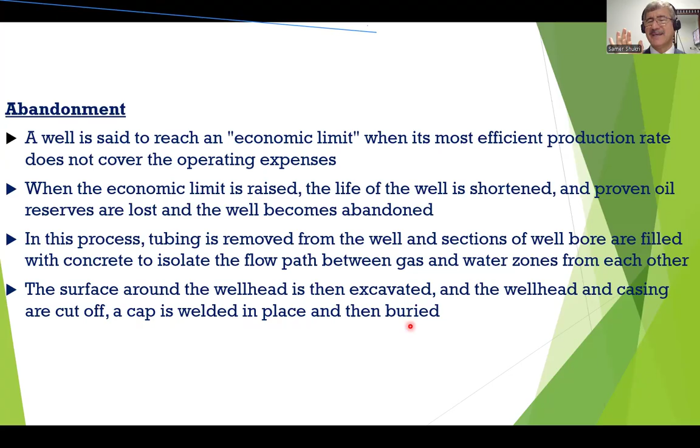Thank you, my friends, we spent 2 hours. I became tired a little bit. Let me drink a cup of water.

Any question, anything? Okay guys, if you have any questions, you can open your mic. Miss Mariam is asking: how can we determine the type of injector well?

So normally 90% of the injectors will be water. But if the reservoir engineer advises that only water will not give the required efficiency, then he may combine it with CO2, for example, with polymer, or WAG, 6 months gas and 6 months water. But normally we use the water. This is the type of injector.